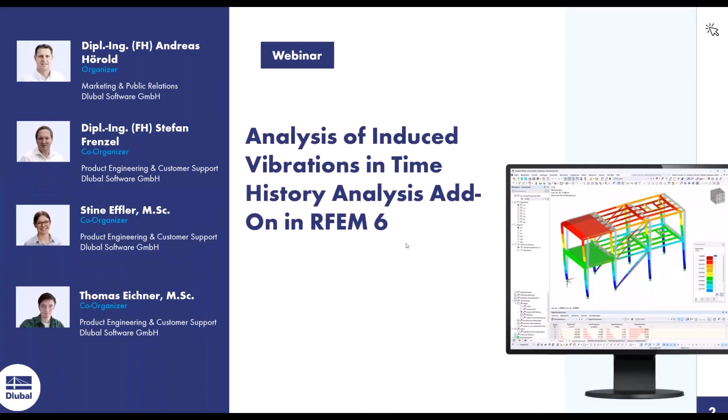Hopefully you can see my screen. Okay, so I will just go on this one. We go directly to content. So as we said in the introduction, we want to have a look today on the time history analysis, the new add-on. I want to show you the features of the new add-on time history analysis in RFEM 6. And here's the content for that. So today I want to give you an overview of the dynamic analysis add-ons which we have now in RFEM or in RSTAB 9.

Then in the next step, we want to do a natural frequency analysis of a structure using the modal analysis add-on. This is part of the dynamic add-ons we have in the program. We want to do it for a building like this which you see on the screen, made out of concrete and steel. The next step of our example is that we want to perform a time history analysis, here with a machine-induced vibration. And therefore we use the time history analysis add-on to separate the loads, horizontal and vertical loads, and to give them a timestamp at the end to get a result. So when we are done with this, I want to show you how to optimize the structure in the case of resonance of the structure.

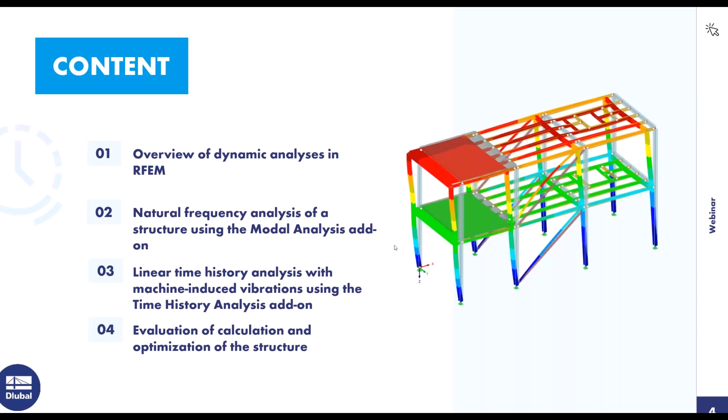Okay, so then I'll go on to the next one, and here you see the add-on modules we have in RFEM 6 and RSTAB 9. So the first one here on the left side is the modal analysis. This is a basic tool in RFEM 6 to calculate the eigenvalues of the structure. So you get the equivalent load factor, you get the eigenfrequencies of the structure, which is a really important tool to do the other dynamic analysis. You need the modal analysis to use the other dynamic analysis tools.

The next one we released was the response spectrum analysis module or add-on. With this add-on it's possible to do a response spectrum analysis in case of earthquakes, for example. It's a linear calculation in this case.

Here you can choose a response spectrum according to a design code, for example the Eurocode or the US code or some other codes, whatever you want to use. You can also create your own response spectra, maybe out of accelerograms if you want to do this, and then the program will calculate for each FE mesh point internally an equivalent earthquake load. At the end you will get the internal forces for the directions and also the combined reactions of the whole structure.

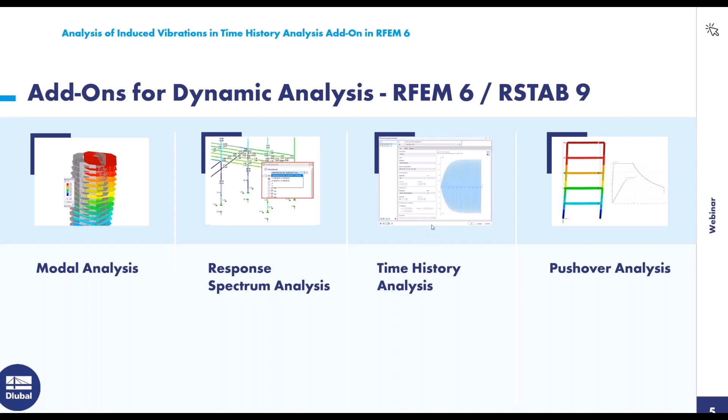This is the one we want to do today, and therefore I created a small example. This is our practical example: a machine-induced vibration. As an introduction, that's a normal steel frame structure with concrete surfaces on this side, and we have a machine which induces a vibration on the structure with a rotating unbalance of 0.2 kilonewtons and a frequency of 5.6 hertz.

And then we want to see what happens to the structure when we bring the frequency, or this load with the frequency, onto the structure.

Therefore I want to switch to RFEM 6 now. Here in RFEM 6, I opened the structure already. You can find it too, or my colleague Andreas will send you a link with the structure after the webinar, where you can have a look at what we do here today.

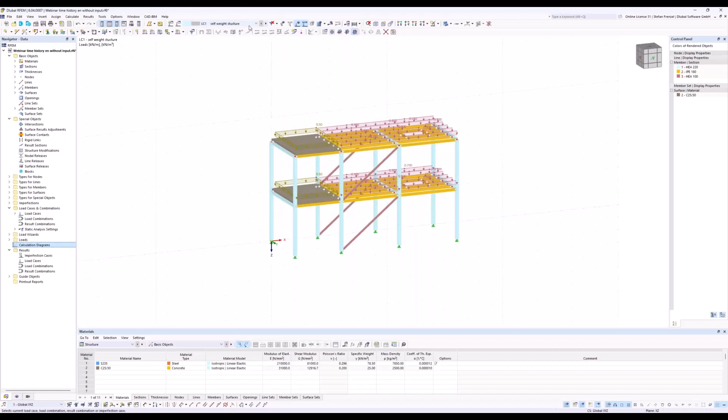Here in RFEM 6, you see first our structure and also some loads, the self-weight of the structure. I also created a self-weight of the machine in this case, and I created some horizontal induced load and a vertical induced load — that's this one and this one. I will show you later how to calculate this, or how it comes about.

But in the first step, we want to do a modal analysis for this structure. Therefore you are able here in the program to go into the base settings of your file, and in the base data you are able to activate add-ons. In our case, we want to activate the add-on for dynamic analysis — here, modal analysis, and also the time history analysis, because we want to use them afterwards too.

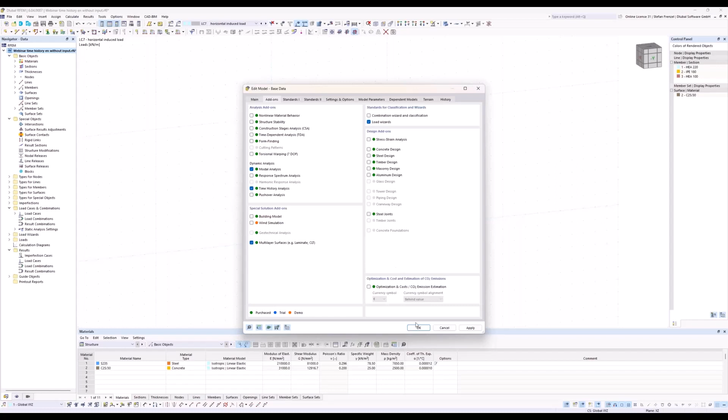You see that in RFEM 6 you are able to activate different add-on modules, for dynamic analysis, or for design of structures, for example steel or concrete. You're able to switch this off and on here in the add-on tab in the base data of the program. In our case we want to do this, and we confirm with okay.

Now we want to do a modal analysis for our structure. How can we do this easily? That's the first question. Therefore I go into the load cases and go first to edit. You see that we have 4 different load cases here.

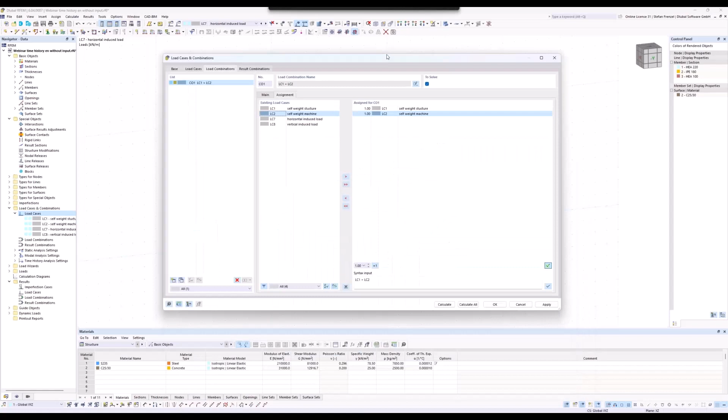For my modal analysis, normally I need 2 load cases. It's a little bit different here because I have to create first a load combination to assign these 2 load cases. Here I want to assign load case 1 and load case 2, because in this case I just want to have a look at the eigenvalues of the structure when the self-weight of the structure and the self-weight of the machine are available — that's why I took these 2 load cases for that.

It's not necessary to choose another static analysis setting here, because for the modal analysis we just use the masses, which are in vertical direction or in Z direction. So therefore we can go back to the load cases, and here we create a new load case. It's load case number 9 now.

If you want to perform a modal analysis in the program, you just have to switch the analysis type to modal analysis. If you switch this to modal analysis, you will have a new option, which are the modal analysis settings. And of course, the program wants to know which self-weight or which load should be used for the modal analysis. So if you have a load case with loads in it, the program will automatically convert the loads into masses. But it's also possible to create masses in the load cases, and then you can use these masses.

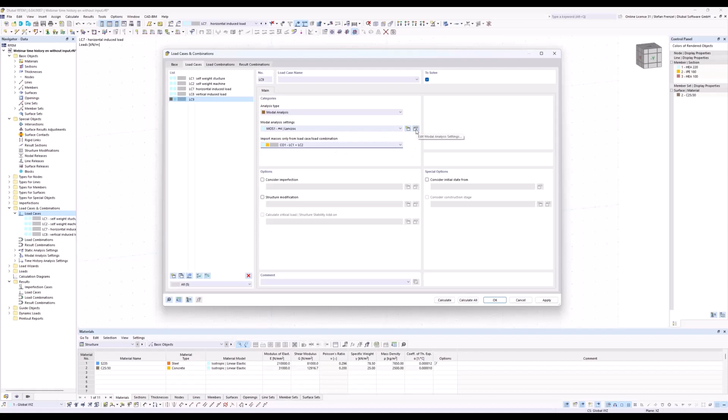In our case, we want to use load combination number 1, which is made of load case 1 and load case 2 together. And these masses we want to use now for the modal analysis. I just have to go into the modal analysis settings because for this modal analysis I need a number of modes. It's not 4, it's 30. So I need 30 eigenmodes for the calculation. I know this because I did it before, of course.

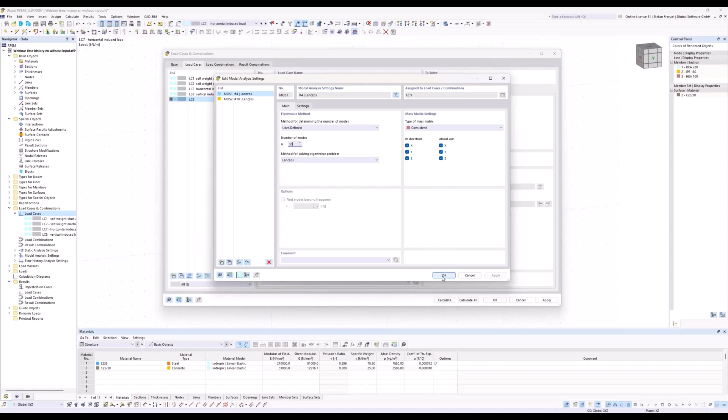Otherwise, you have to choose your own value, or you have to prove it, of course. The mass matrix should be consistent. That means the masses are distributed on the members via a function. That's normally the best way to do this, because it's the best way to consider the masses exactly on the structure. Then we can click OK, and we can do a calculation.

Now you see the program will mesh the structure first, and then the program will calculate load case number 9. So it's not necessary to calculate load cases 1, 2, or the load combination, because we just took the masses from these load cases or load combinations. Our first natural frequency you can find on the result navigator. Here, of course, you can switch to the eigenvalues.

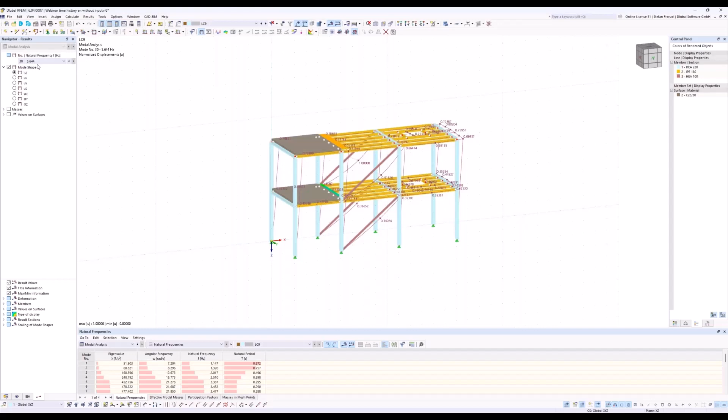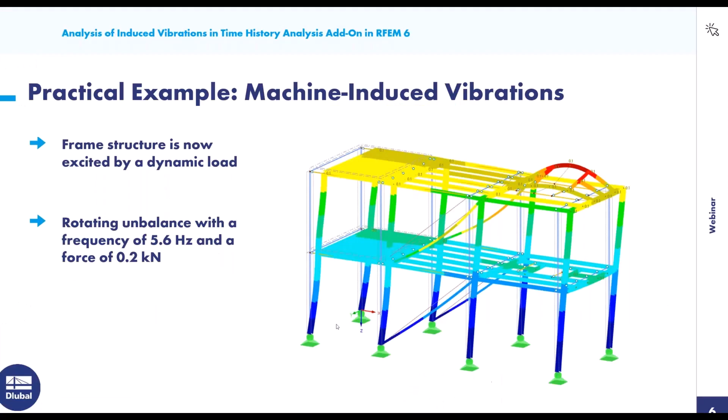But here's a really good eigenvalue. It's also 5.6 hertz. It's like our induced vibration, and you can see the structure will move in x direction globally. That's normally not so good when you get this. Because in this case, I will switch back to the presentation. In this case, we have to define now the input values for the time history analysis.

And I told you that we want to use 0.2 kilonewtons as rotational mass, or as unbalanced mass of the machine. I have to calculate these 0.2 kilonewtons to the member length, and then we get 0.025 kilonewtons per meter. And this I put on the structure in load cases number 7 and 8. You see here the 0.025, and here also I just divided it by the member length where the machine stands on, and then I calculate this value.

So if I go back to the input values, I have to define now two diagrams, one for the horizontal and one for the vertical. The difference between the horizontal and the vertical is just a shift of pi/2. In this case, by the rotation of the mass, I have a vertical maximum load and a horizontal maximum load, and it's described by a circle. So that means I have to use a sine function for that.

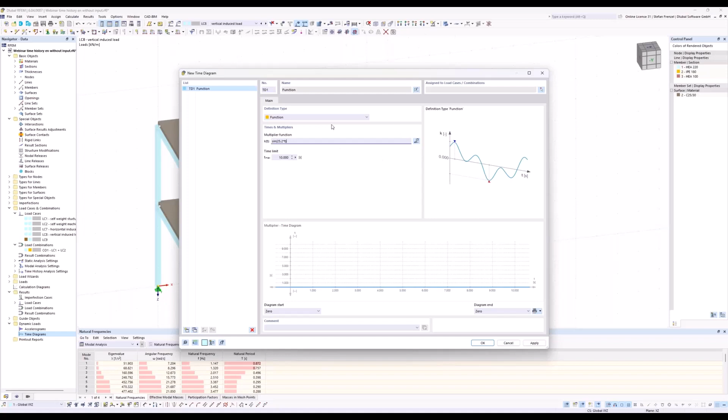The other option is that we can use a function, and in our case, we want to use the function because it's a really easy function. It's just the sine of 35.2 multiplied with the time, that's all. And then you should get the result for it.

So we want to get a sine function. In this case, we don't call it function, I just want to call it horizontal part. Sorry, there's an R. Like this. And I copy the whole function again.

And here I just add the value 1.5708 to get the switch. And I will change the name to vertical part. So these two functions describe the induced vibration of my structure, nothing else.

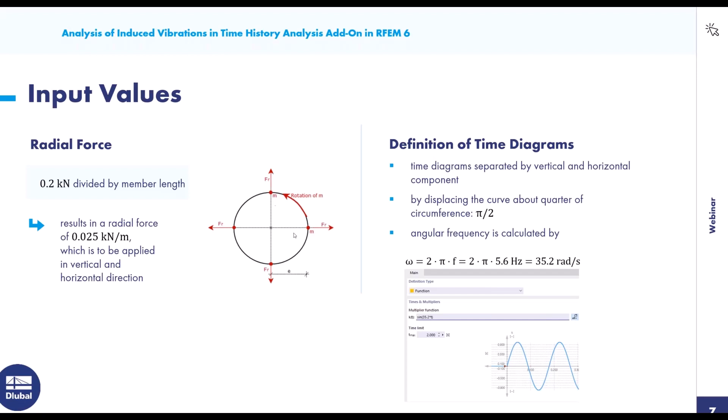Here you see the switch between them: here we start with a maximum, and in this one we start with 0. That's the same as I do it with my circle: when I have a maximum load or force, then the force in the other direction is 0. And if I rotate more, say 90 degrees, then the other one is maximum and the first is 0. Therefore, I use the function to get the same behavior.

Like in my presentation. Sorry for the interruption.

In the PowerPoint, you used 35 rad. Oh yeah, that's correct, 35. So it was just my fault, yes, it was just a typing error from my side. No, I have it also on my letter here, 35.2. Okay, thank you for the interruption.

Okay, then we can go on. I changed the value to 35.2.

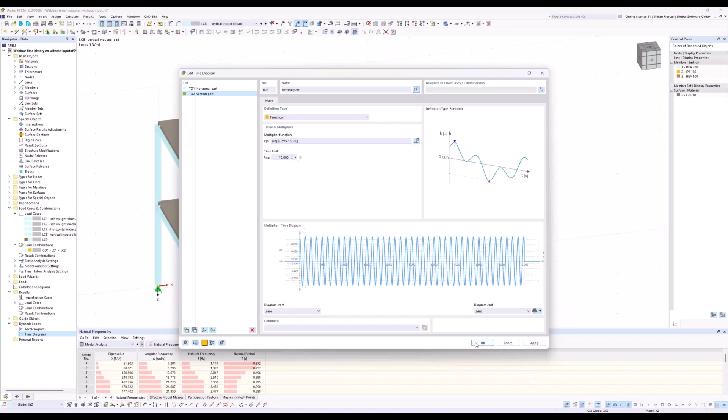So the next step is just to show you that we have here the angular frequency also of 35.4, so it's near to 35.2. That means for me it could be that I get a resonance for the whole calculation if I do this, because the horizontal part here is like this.

That's my horizontal load. And if I look at this eigenvalue 35.2, I just have to go to load case number 9. Then I see a deflection which is also in the x direction. That means normally for me, okay, you have to be careful, here could be a resonance in the structure.

So with this knowledge, we go now to the calculation of the time history analysis to show, or maybe we don't see this, but hopefully we can see that there's a resonance in the structure. Therefore, we have to create a new load combination.

And in this new load combination, we are also able to change the analysis type to time history analysis. That means we are able to assign load cases, and these load cases we are also able to assign to a time diagram.

And now here we have our input for that. That means we have a horizontal load with a time diagram, and we have a vertical induced load with a vertical part of the time diagram. And that's normally all for that.

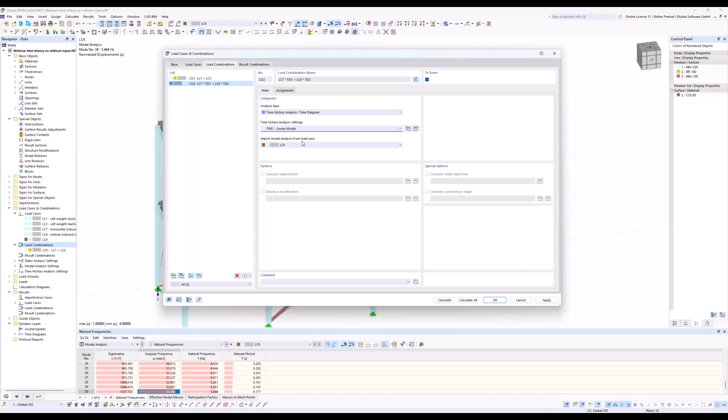And if I use, of course, the linear modal analysis for the time history analysis, then of course I have to choose here the result of a modal analysis. That means for me, I just have one load case with a modal analysis, so I can just use this one. And then we can click on OK and calculate the whole stuff.

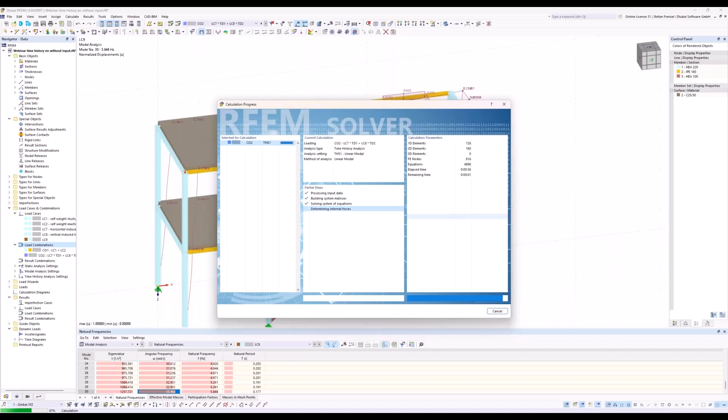The program will now perform the time history analysis over 5 seconds with a delta t of 0.01 seconds. So there will be created a lot of results, of course, but it's necessary in this case because I have 5.6 Hertz as induced vibration, and therefore I need, of course, a small time step. So, okay, 35 seconds, it was not so long.

Okay, so what's the result of that now? The results are also like in RFEM5 or like in the old program. You get the results here as a summary in the global table of the structure, and maybe some of you know or used the old one, and here it was possible to create also directly a diagram. It makes sense to have a look at a diagram, because here I can't see anything.

I can of course switch through my time steps, but it makes not so much sense because I normally pick one point and I want to see this point over the time. What's happened to this point? And therefore we have here calculation diagrams, which you can find in the data navigator.

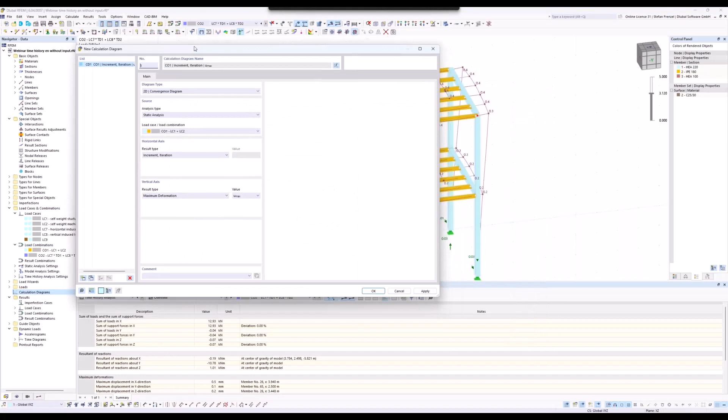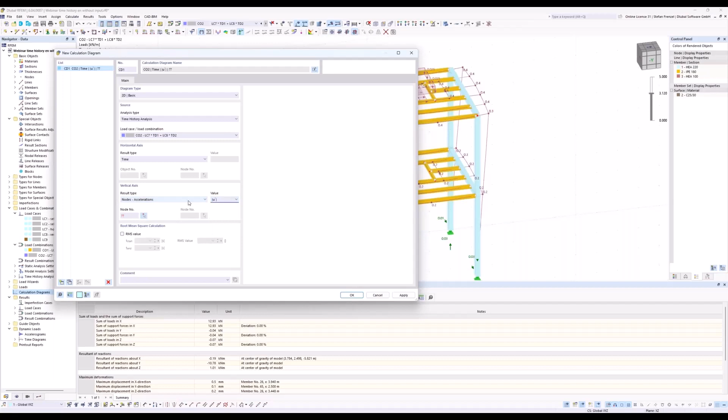If you just click here on new calculation diagram, you will be able to say, okay, you want to have a basic diagram, 2D. We want to have a diagram from the time history analysis, load combination number 2. That's correct. And here, for example, I want to have a look at the nodal accelerations. That normally makes sense. So I take this one, okay, and I just have to click on a node. Maybe I want to have a look at this node.

That looks not so nice. Maybe we take this one. No, wait, X. X looks nice. So the X direction. The other one, this one here, is made out of all directions. Therefore, it looks a little bit strange.

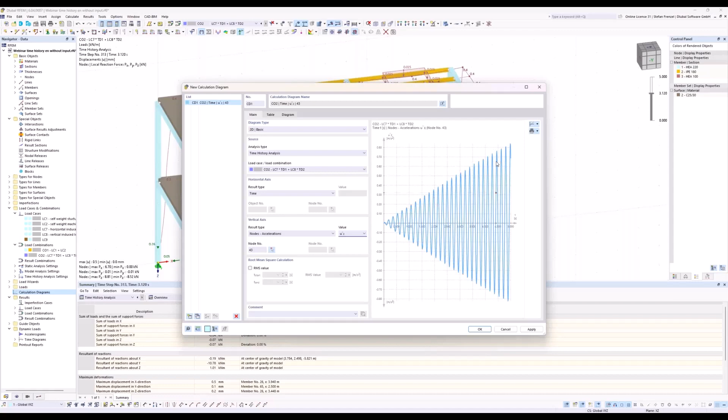But in our case, we should have a look at the acceleration in x direction, and here we can see, of course, a nice picture of a resonance calculation. That means the resonance is really high. So we will get a resonance in the structure, and maybe that's not so good because now our structure can get a failure by this.

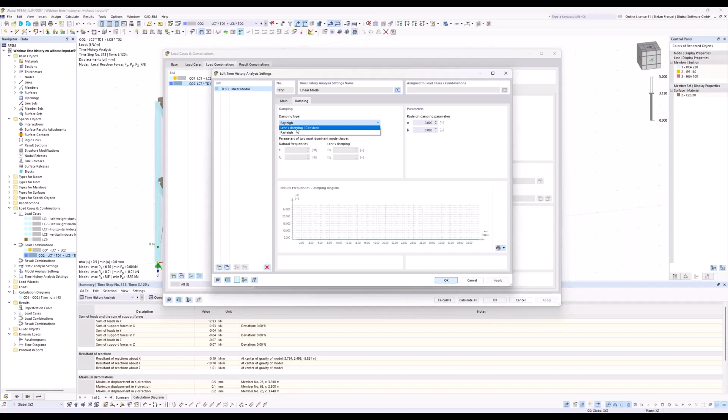What we can do now is, of course, go to our load combination number 2 and say, okay, normally if I do a time history analysis, there is also a damping. Here in our case, if we use the linear modal analysis for the time history analysis, we are able to use the Lehr's damping. And here I want to use damping of 0.02.

If I use here the linear implicit Newmark solver, then I'm just able to use the Rayleigh damping coefficients. Therefore, I have to calculate them at first. This is easier because you find it also in the literature. You find Lehr's damping values for structures made out of steel or concrete.

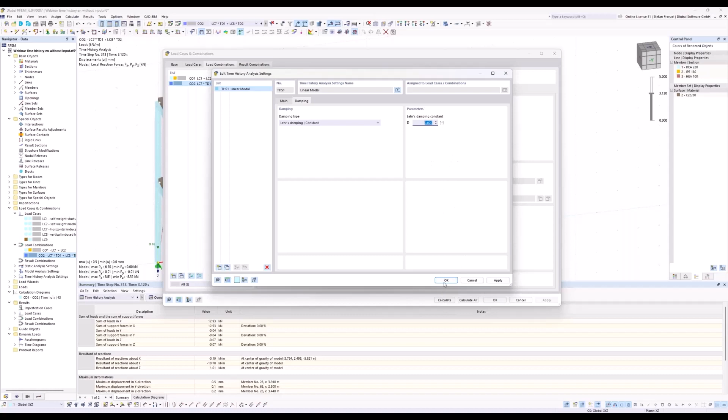In our case, we want to use 2% of that, and then we just have to recalculate the whole stuff. So that means we just calculate load combination number 2 again. And then we will hopefully get here also a result.

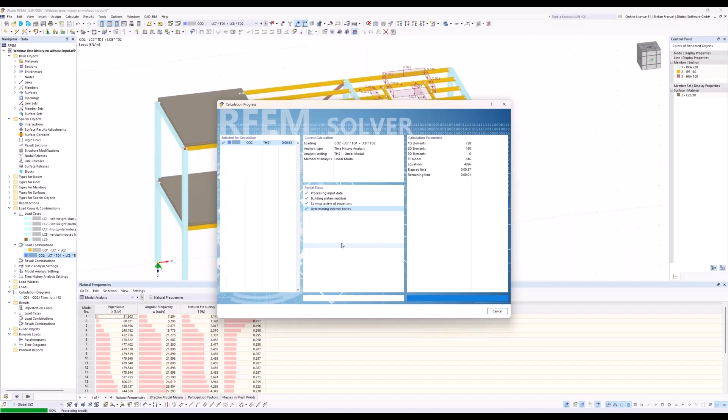So, okay, now we are nearly ready. Okay, so we see that we see nothing. So that's why we go back here in the time on the calculation diagram. And within the calculation diagram, I see now here a maximum of 0.24 meters per square second.

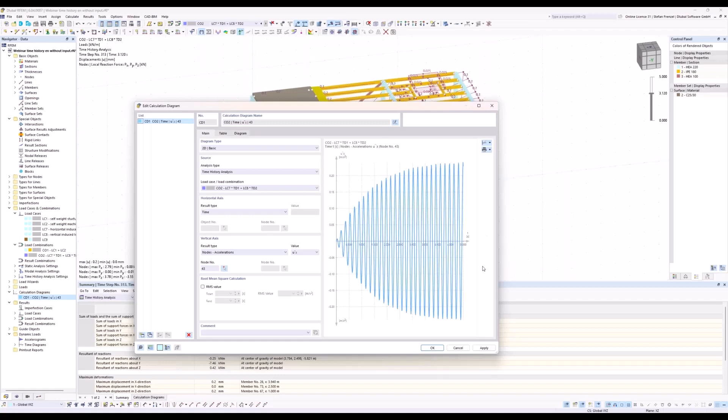That's of course a high value, and that could be, also by using the damping, that it's not sufficient for using the whole building like this. So now we come to the point where we normally have to optimize the structure. One optimization could be we use another machine, because if we have another induced vibration, then maybe it could work. But normally, it's also possible to change something in the structure.

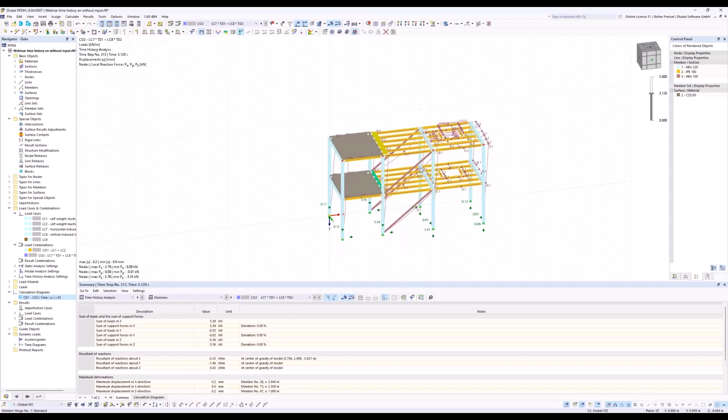Here in this structure, I want to change the bracings, because maybe I take another axial stiffness for these ones. Then of course the eigenvalues of the structure will change, and hopefully it's then possible to use the same machine, maybe with another bracing or another cross section type. But how can we perform such an analysis?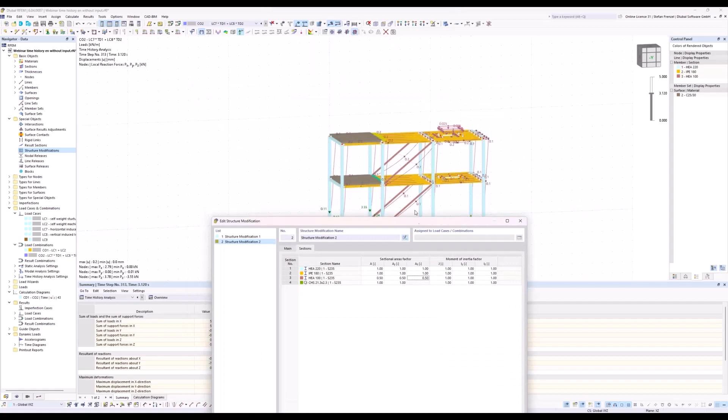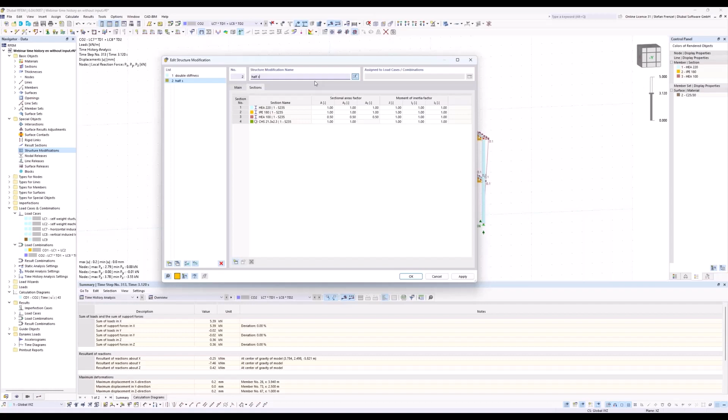And another option could be that we copy the structure modification and say, okay, maybe we take just half of the stiffness. That could also be an option, because an HEA 100 is maybe too big a cross section type in this case. So here we created now 2 structure modifications. I will change the name here, I will call it double stiffness, and I will call this here half stiffness. And that's all.

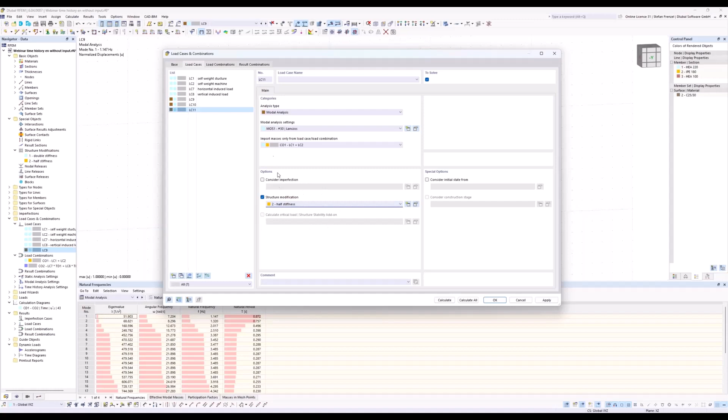And now I want to consider this double stiffness or half stiffness in the calculation of the time history analysis. So therefore, I just have to edit my load cases, because for my load cases I have to consider now also the stiffness modification. That's really easy, because I just have to copy load case number 9 to load case number 10, and here I want to have the structure modification double stiffness. Then I copy it again, and here I take the half stiffness. That's all for it.

For the load combinations, of course, I have to do the same. I can go here in the load combination, copy it, and say, okay, here I want to have load case number 10. If I choose load case number 10, the program knows that in load case number 10 a structure modification was used, and therefore it is also used here. If I copy this load combination again and use 11, the program will automatically take the half stiffness, because this one was used in load case number 11. Okay, and that's all. Now I can calculate.

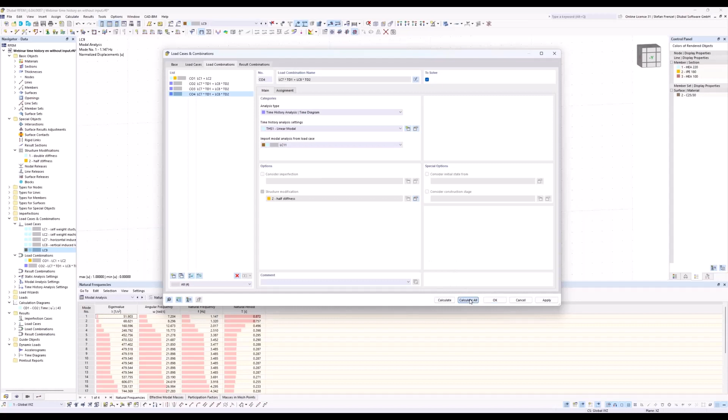So you saw that the program will calculate first load case number 10 and 11, because they are essential for combination number 3 and number 4. It's not possible to calculate load combination number 3 and 4 alone. So the results have to be calculated first, and this was done in load case number 10 and number 11. Okay, then the program will do the calculation. I think it will not take so long.

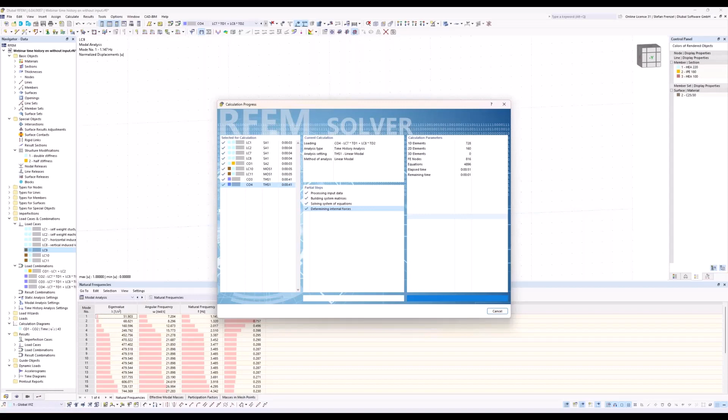Okay, and now we have the results here. So then maybe we can have a look on that at first.

We can go to the result diagrams and edit them. So we see that we had a look on load combination number 2 for the acceleration in x direction at node 43, and here we get a high acceleration for that, caused by the resonance of the structure.

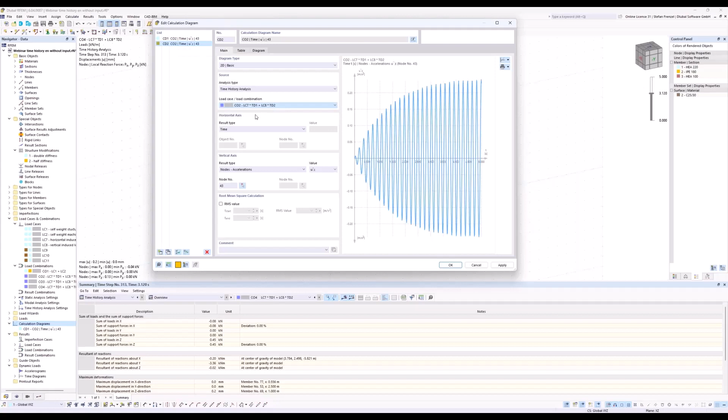Then I will just copy this calculation diagram, and here I will choose combination number 3. You see that we have at the beginning the induced vibration, and after this beginning, the structure will vibrate with constant values normally.

But you see that the accelerations are really small. They are so small it's not possible to have a look here directly on them, so it's normally nothing. This is the result when I do it here with the double stiffness of the bracings.

If I use the half stiffness of the bracings, then the result looks like this. So that means if I use smaller cross sections for the bracings, I get an acceleration in this case which is also really small, 0.03, instead of 0.2 meters per second squared.

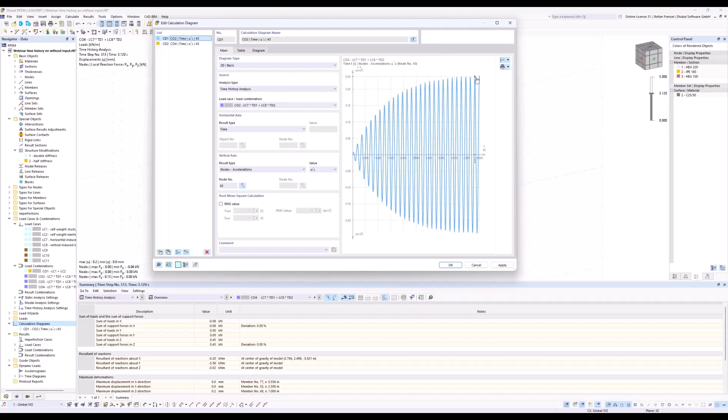And therefore, you can also choose maybe a smaller cross section or a bigger cross section. That depends on you and maybe also on the stress level of the structure.

But normally these bracings could be really small because you just need the actual forces in it, or you just have normal forces in these bracings because they are hinged at the start and at the ending, and therefore it's normally not so necessary to use big cross sections.

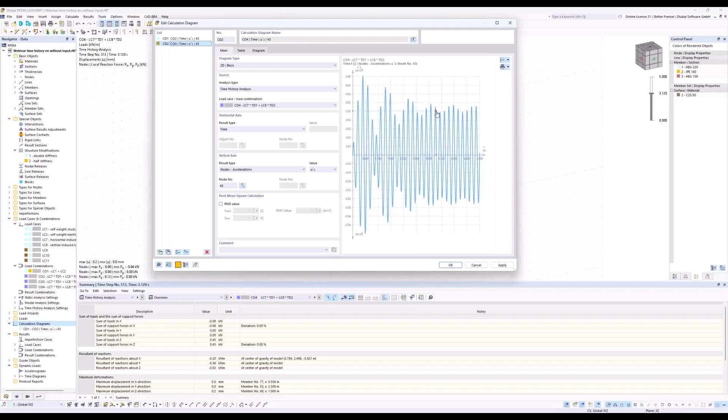So in this case, just by changing the bracings, you will be able to work also with this machine on this structure, because the induced vibration of this machine is then not necessary anymore for the structure.

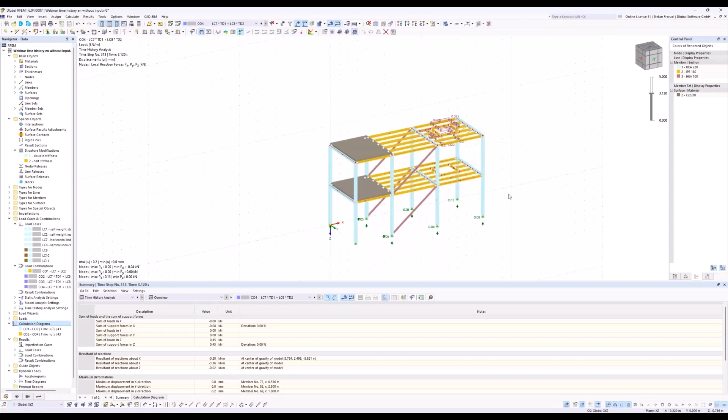But it's always good to have a look on such things, because nobody could notice that we get an induced or a resonance case, like here for such a machine when I put it on the structure. And therefore, you can design such a structure just by choosing other cross-section types or using the structure modification to get a result for the structure which is usable at the end.